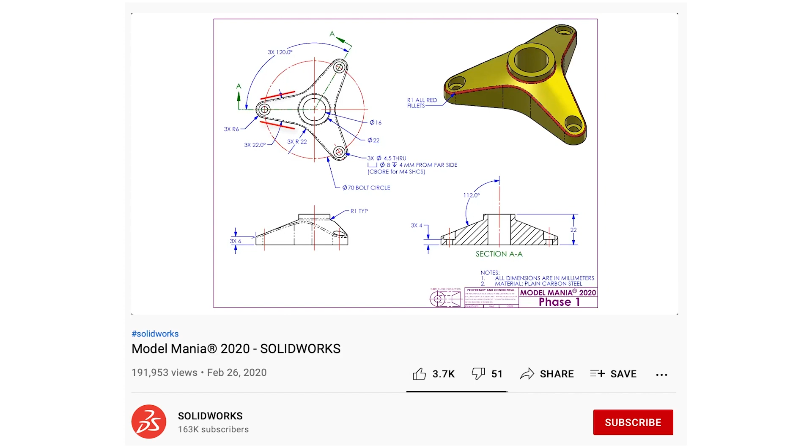I've been going back through Model Mania, a SolidWorks competition event. It takes 3 minutes or so, they give you a model and then some design changes at the end. You have to make one model and then modify it, all within time limits, and you win prizes if you're fastest. Speed isn't really important here, but it's cool to see how efficiently someone modeled it with design changes in mind. It's been really helpful for me to go back through because some of these are actually kind of tricky.

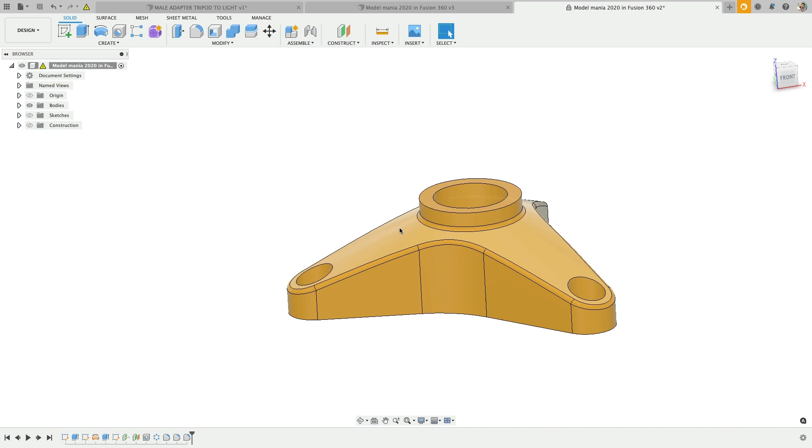Here's the finished model, at least for phase one. A few challenges stand out: this rounded and angled sloped face looks kind of confusing. This shape, when viewed from the top, isn't too challenging—it looks like a pattern, like one of these. So that isn't too bad, and I think you'd pattern it. Then there's this hole that's also a pattern, which looks tricky because it's a counterbore sitting low.

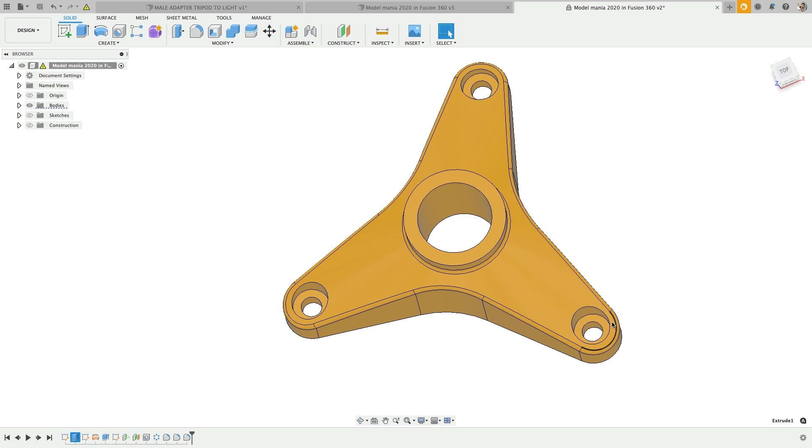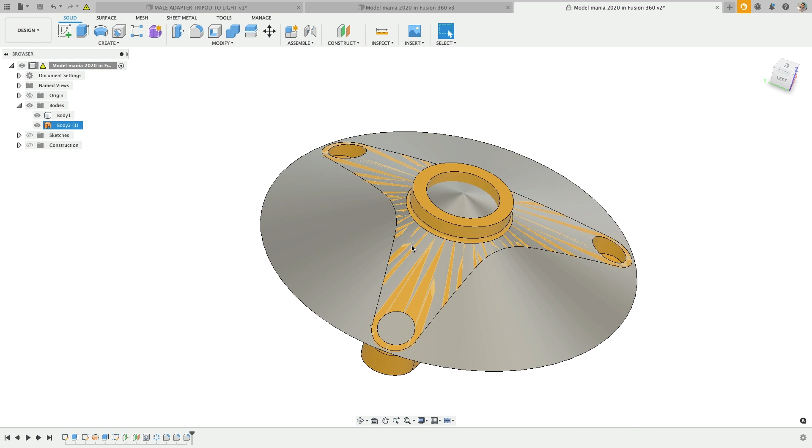Strategies: number one, definitely use pattern. Number two, we're going to create a rounded surface that we'll extrude up to—that's huge, sometimes I forget you can just create a rounded surface like this one. I can use this rounded surface and then extrude up to it to create a more complex shape, very cool. Then we'll modify or trick the Hole Wizard to drop a counterbore hole down low—that'll be interesting. Then we'll move into the second part of the design.

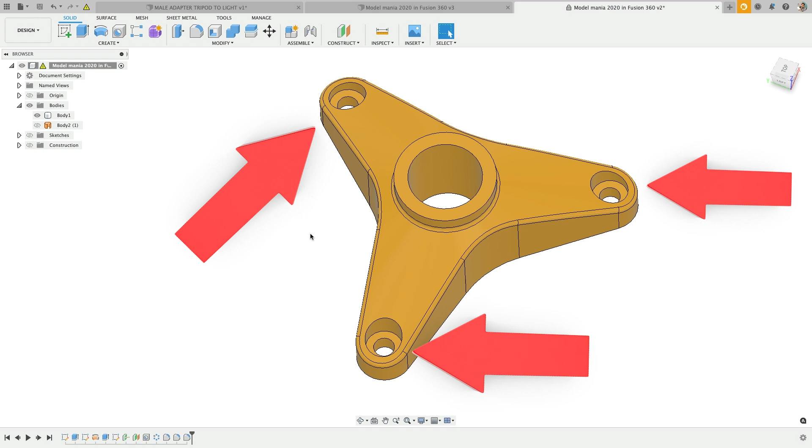Let's look at how to model this in Fusion 360. Starting on the top plane, I sketch a couple circles—look for some circles and sketch those out. I'm in millimeters, so I want to make sure my document settings look good. Hit D for smart dimension, and set 22 millimeter and 16.

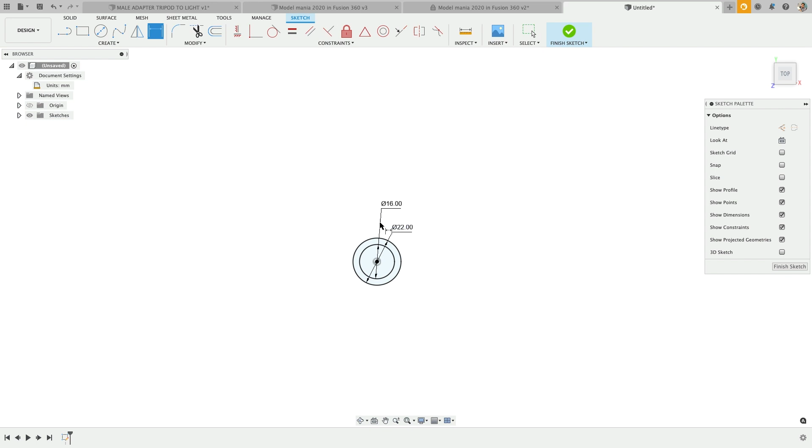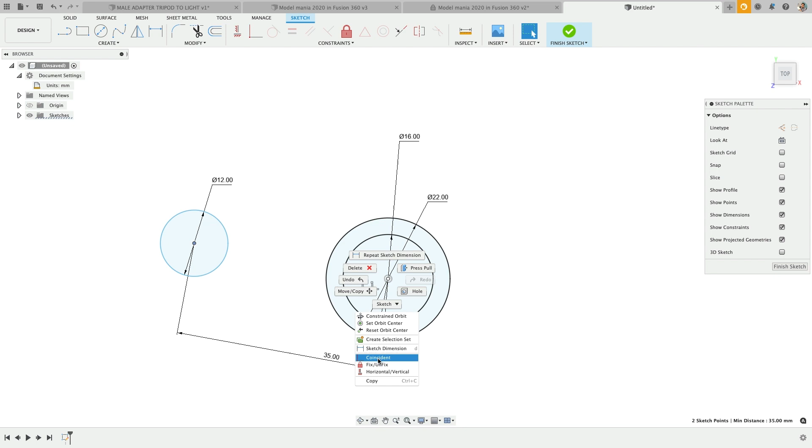Nothing crazy here. Then I sketch a circle off to the left, hit D for dimension—12—and dimension from point to point, which is 35. Now it starts to get interesting. Remember that dimension doesn't anchor this down, it just shows the distance. I'll select the two points and do horizontal, and now that's locked in space.

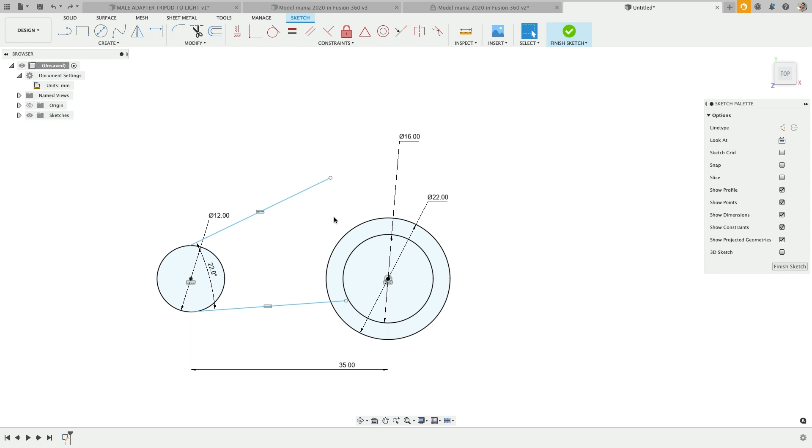I'm going to sketch from this quadrant up, though I don't know exactly where it goes yet. I'll do another line—these are going to be equal, I know that, so I can make them equal. And I know the angle, so I select both lines and set 22 degrees. That's not quite there yet, you can see it's pretty crazy, so I'll undo those movements and set it to 22.

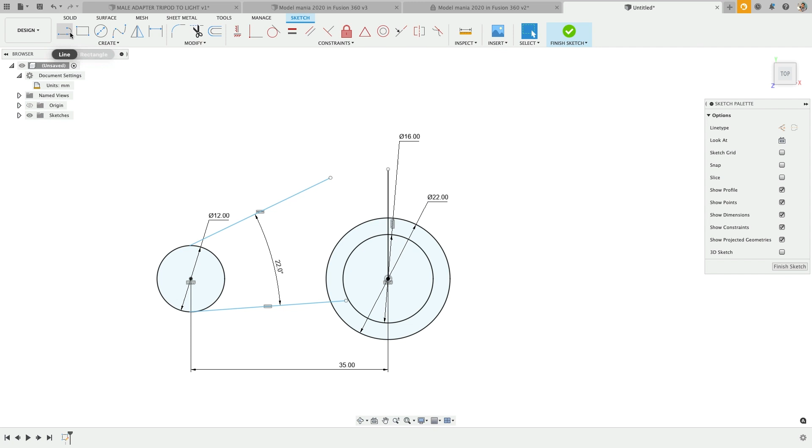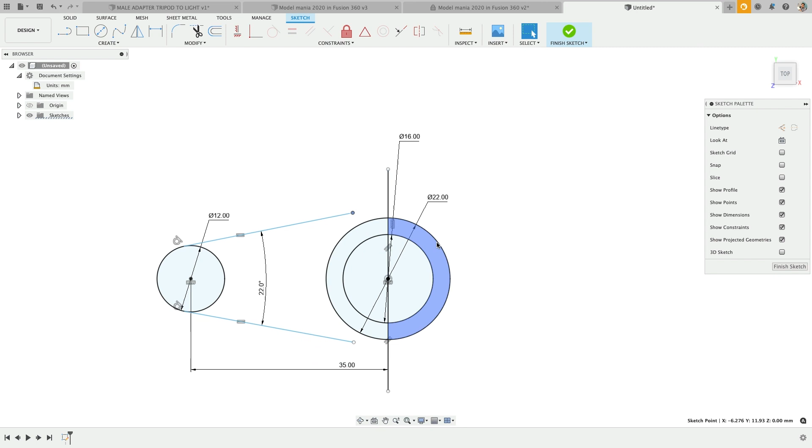Now we want to extend that with a line. I can do a line coming up from the center going vertical, and another line going down, extending until it hits. I do want tangency too, so I'll do line to arc tangent, same thing. There we go, that's better—gonna be better behavior. Now we could do just an extend, hit S for search, extend. We don't have to do this to clean it up, but mentally it's nice—a clean sketch is easier to read, easier to look at, easier to modify sometimes.

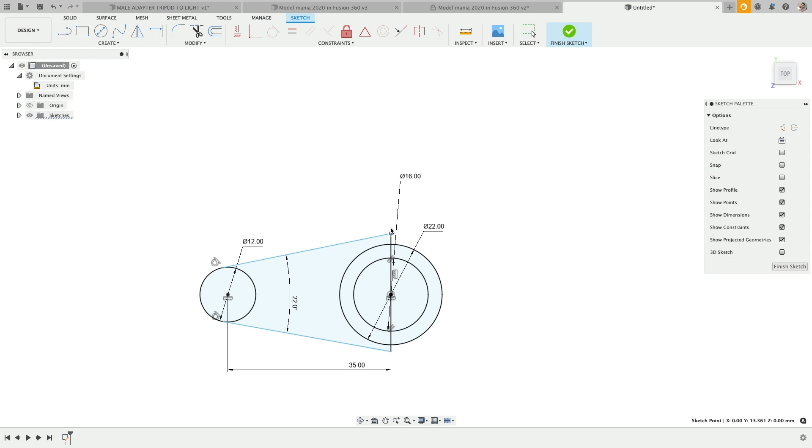So how do we get this symmetric? A couple ways to do that—we can do a center line and just align it. I'll hit X for construction to make the construction line first, then select these two lines, all three in that order, and do symmetry. Are we not quite yet equal? These two lines should be equal—there we go.

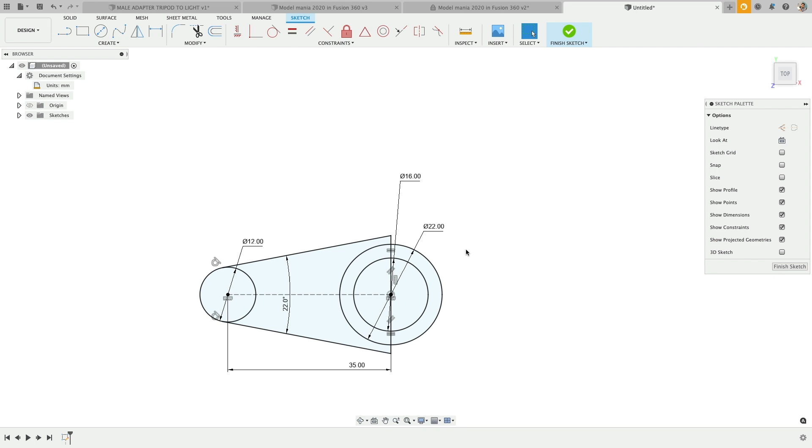This sketch looks pretty good, so we'll start to extrude it. Just extrude that going up, extrude that cylinder at 22. Perfect, and now this is where it gets interesting.

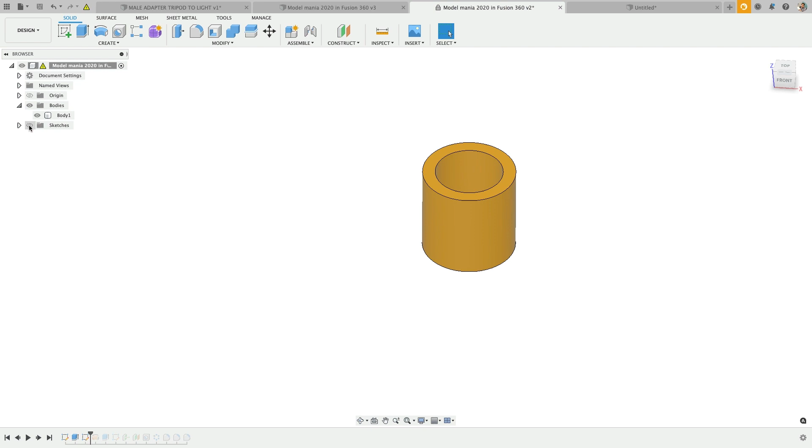You're going to sketch a line off in space, and this sketch line will become a revolve or a surface. So there we go—this line out in space. A few things we know about the line: it's at 112 degrees to this angle, and it's 8 millimeters off from that edge, and it needs to be extended to reach the other sketch.

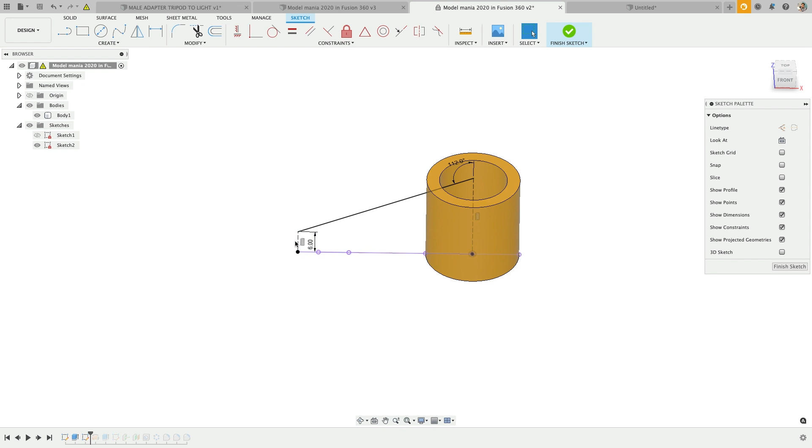That's what I have—I've aligned it. So whenever you need to reference another sketch, hit P for project and select this edge, then you can reuse that as a reference. So if I'm going to do a line, I can hit P again—there you go, it projects it. Awesome, and then we'll sketch a line coming up.

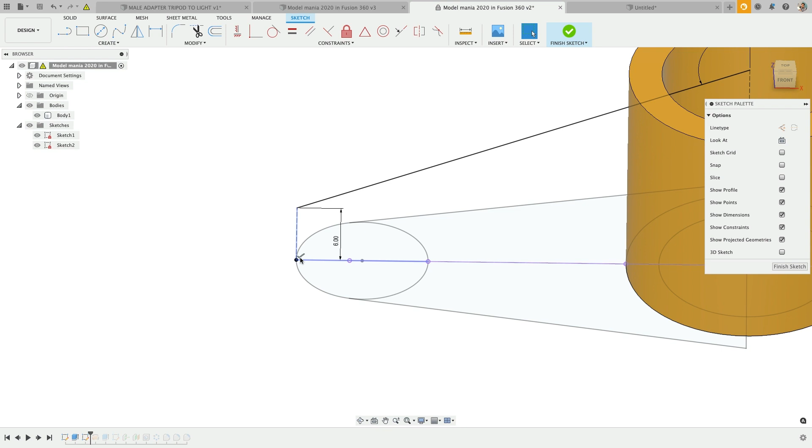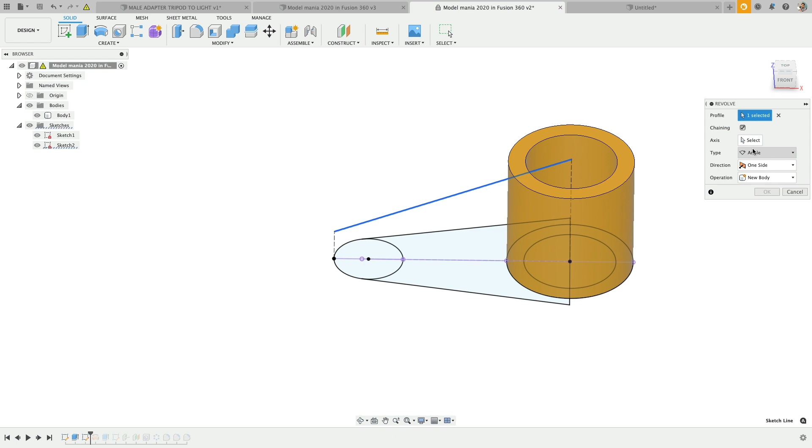We'll do construction, connected at that point, so if this circle ever gets longer, this line should extend out a little bit, or adjust anyway. Okay, so we have this line, and that looks good. We're going to do a surface revolve—we'll select this surface and this angled line as the axis in the center. We can see this nice new surface body, and we're using this as a guide. Pretty cool, something to keep in mind.

You don't have to achieve something in one feature. You can sometimes just extrude it up. Okay, so now for the tricky part of extruding up to hit this.

Now, there is a gotcha with Fusion 360. You cannot just extrude to what you want to hit by default. It won't just work, it wasn't for me. So go up to Object, select the surface, and it will fail.

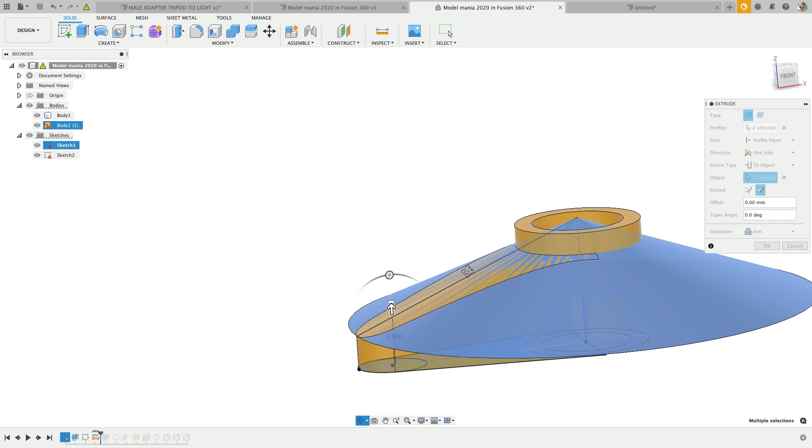I tested a bunch of different things, and it seems to solve much better when you use adjacent faces. This seems to be the gotcha for me. I tested on a couple different parts. This selected face I thought should work, but it needs this adjacent faces.

Okay, now turn off that body. Great. All right, now for the hole wizard.

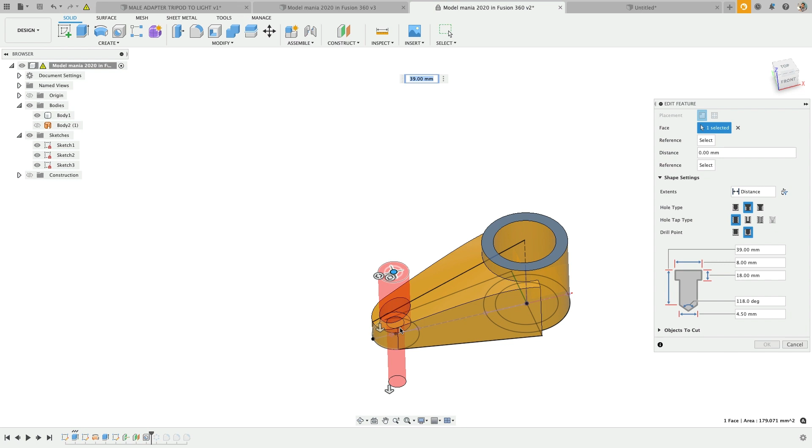This one's interesting because in the SolidWorks Model Mania, they effectively just drop it in and then manipulate the sketch in which it derives, which we can't do. We just have a feature that we're editing. So what I did was I selected this top face as the reference and then dragged this over until it referenced that center hole, or an axis. You could create some sort of reference that you connect to, but that was good.

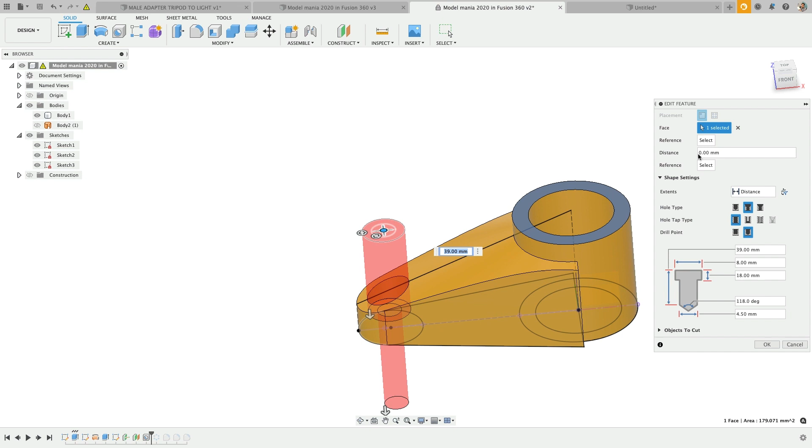But I used the counterbore and clearance, so I used the sizing. I went down and found M4. Great, and then click off of that. So I click now to simple, and it keeps that shape for me.

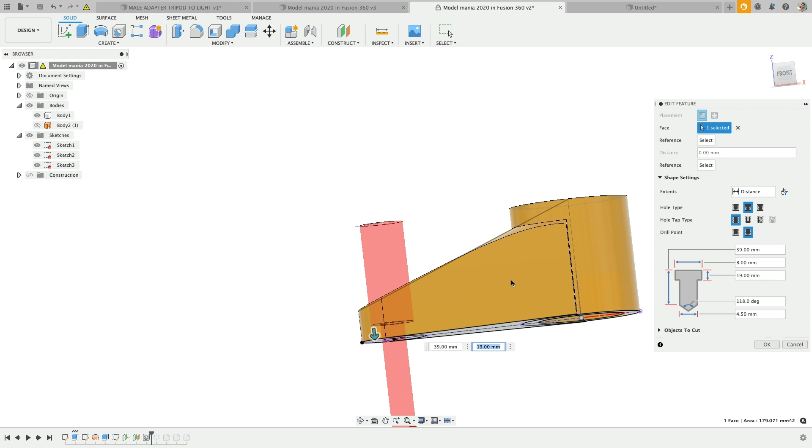And then I can manipulate this until I come up to a distance. I know that when I measured this face in the SolidWorks sketch, that's supposed to be 4 millimeters. So when I come in and find this extends here, that this 39 gives me the 4 millimeters. So I just adjusted that to hit. So not quite as easy as SolidWorks, but it is possible.

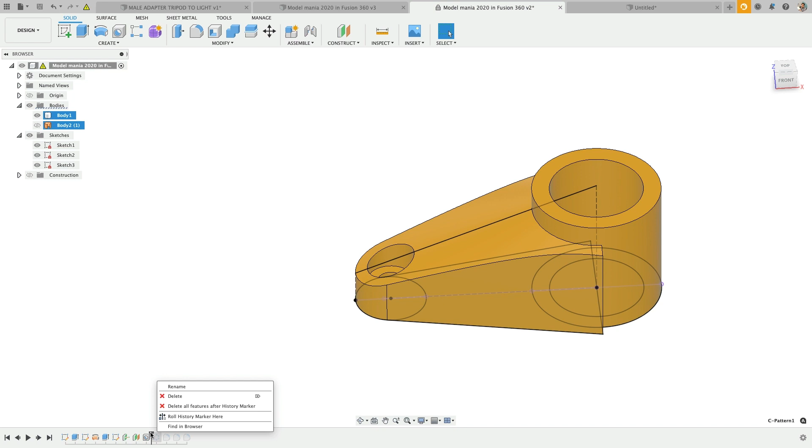It's doable. So next is the circular pattern. That one's pretty easy. Turn on the circular pattern for features, and what we want to do is pattern this whole feature and the whole feature, so I'm doing both, right? The hole and the solid. So I got both, and then this axis, doing 3 of those.

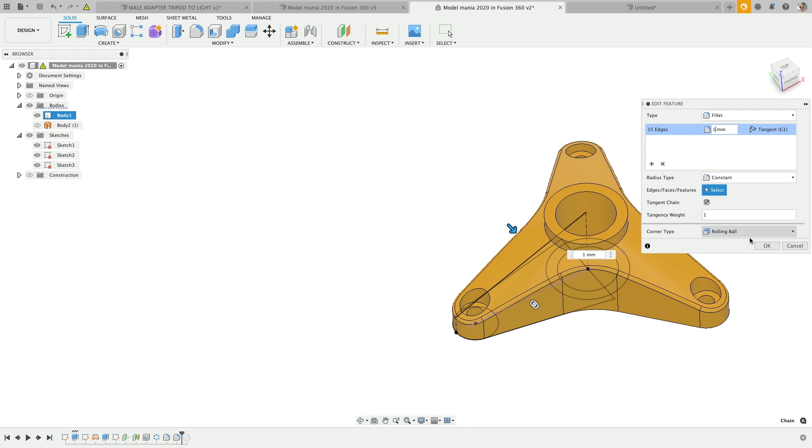And then the final fillet up here of 1 millimeter at that edge. Great. So this is phase 1.

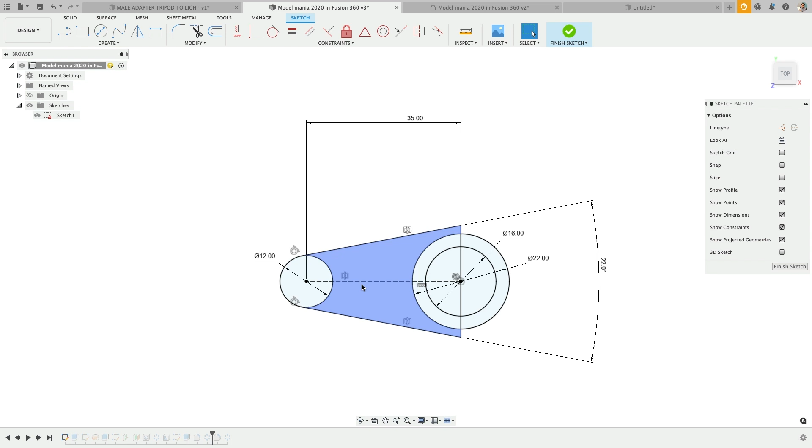Okay, let's get into phase 2. Okay, so this is our end goal. A few things that get modified. We modify the angle dimension, so we go back and we change this to 8 degrees instead of 22. So double click, change your sketch from 22 down to 8, and then hit rebuild.

Okay, now the things that we have to come in and do, we're here. Okay, so now how do we create that kind of cutout part? Now there's several ways you can do it. Because it's uniform, shell does work.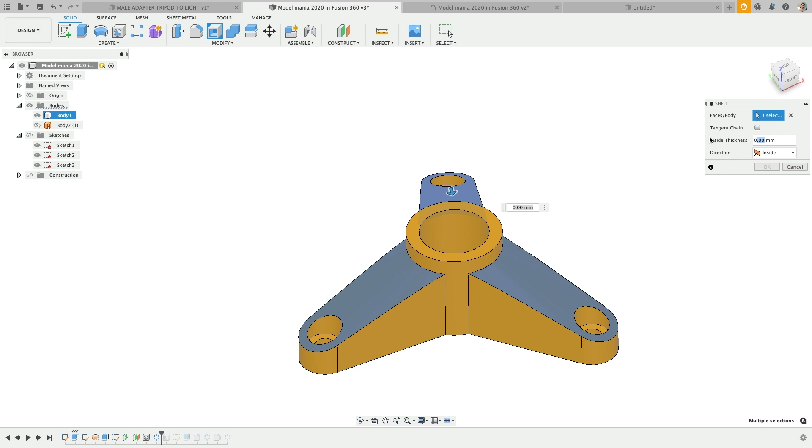So I can do shell and I can do faces. So I'll do these 3 faces, and I believe it's 3mm. We shell that out. Great.

Now here's where it gets interesting. There's a face fillet in SolidWorks, and it allows you to do a nice fillet between these 2 faces and not have to calculate everything. But in Fusion 360, we don't have that luxury, we can't use that feature. There is a rule fillet, but it's not designed to be used for faces just yet, from reading the forums.

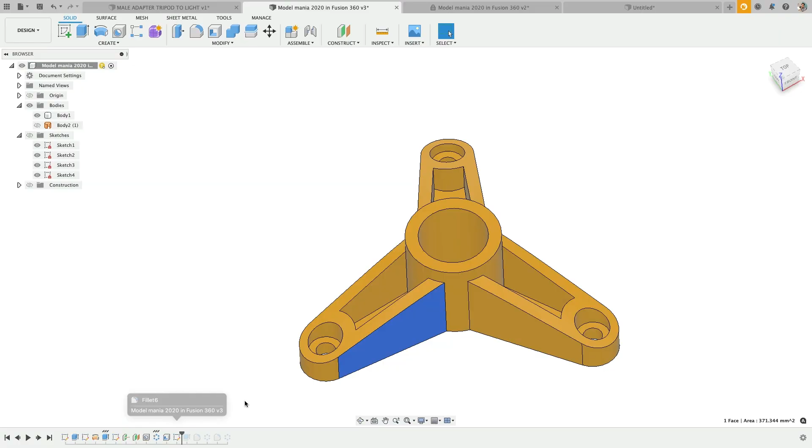Okay, so how do we create a 30mm fillet that achieves the same thing if I don't have that special fillet that they have in SolidWorks? So I created just a simple circle on the bottom, and I'm going to extrude that up. Now I extrude it up, great, but how do I get it to align nicely with that surface?

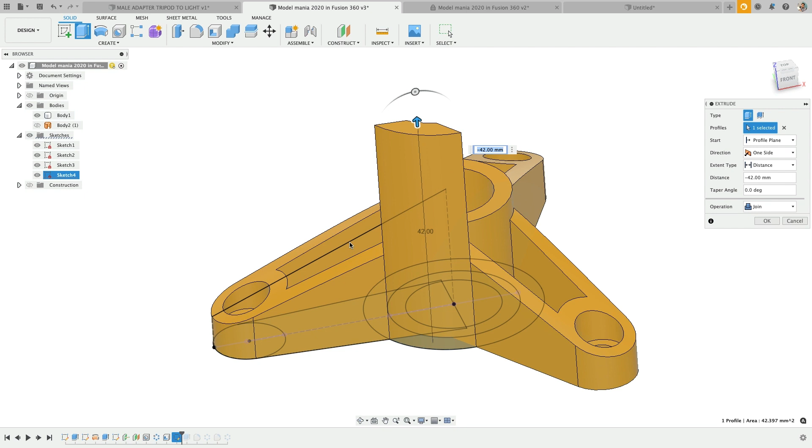Now, luckily we have that same surface body, it's that surface body that's perfect. So we'll do an extrusion up to the object. Again, same challenge where you have to come in and do to the object, but you do have to choose adjacent faces.

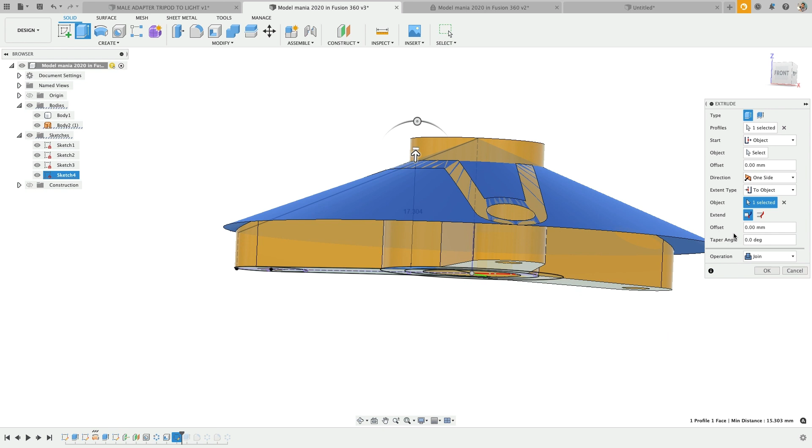Now we could come in and do all 3 areas at once because we have 3 fillets to fill in. And hide that surface body once we're done. Join it together, and you can see it creates that similar effect to the fillet that they were doing.

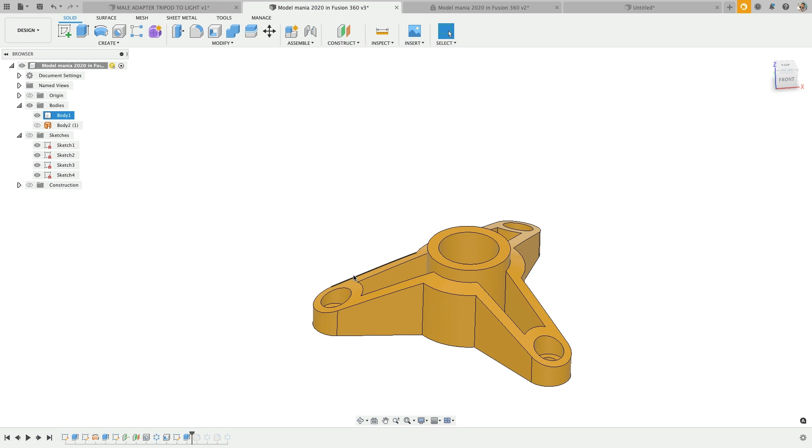And then adding the fillets as a finish. The big one that I'd want to show you for sure is this, I believe it's a 1mm inside. So if we do fillet, face, we want to do all of the interior faces that it's going to touch.

And we don't have to go around and do all 3. We can do those 3, and we'll do 1mm. Great. Now how do you can actually pattern that around. So a circular pattern, S for search, I'm going to do features. I'm going to do just the fillet and select the axis of this circle. It brings it all the way around.

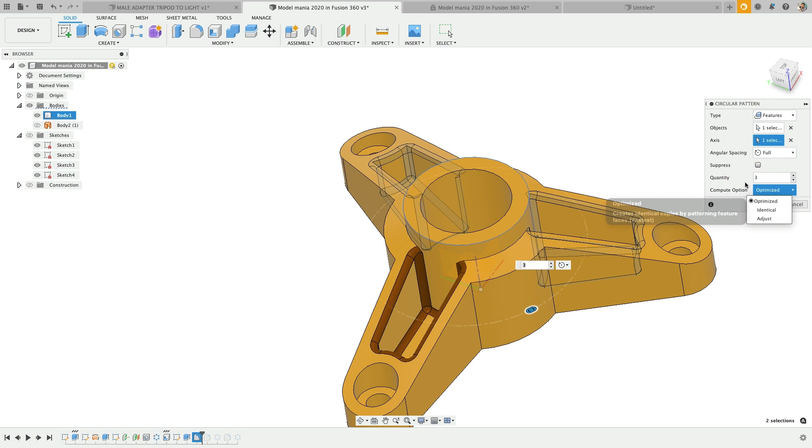Great, optimized works, but adjust does not solve. In this case, it fails. So don't forget to look at your options here, your compute options. Cool, so then we can add these remaining fillets and we're done.